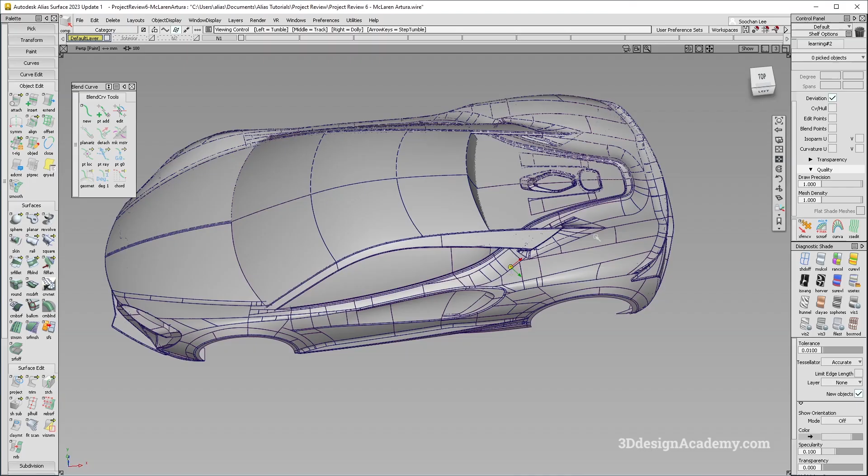In this lesson, I will be doing a project review of a McLaren Artura model. Now, if you guys remember, I did a project review of this model quite some time ago. The person who created this also sent me his latest improvement, so let's take a look at it. So I'm just going to turn this off and turn on the new model.

And as you can see, he made quite a lot of improvements in the model. There were more features added, such as this hood feature over here. Wheels were added, more details, as you can see. So overall, quite a big improvement. So if you were to just do a side-by-side comparison between this one and this one, let me just move it a little bit more like this.

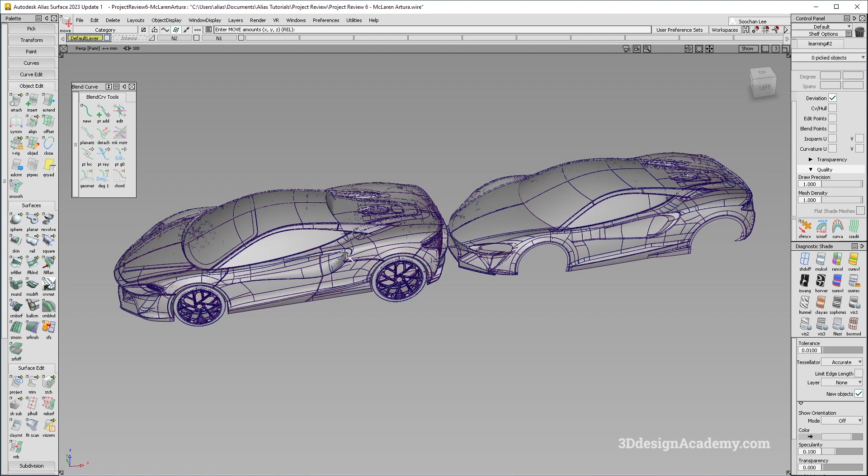You'll see that now the patches are a lot more logical, especially in this area. This area is a lot smoother, less patches, which means surfaces are going to be cleaner. There's definitely more details. Even the CV structure, if you remember this one, I think there was a little bit of an issue here. I think that's been resolved. Overall, quite a lot of improvement.

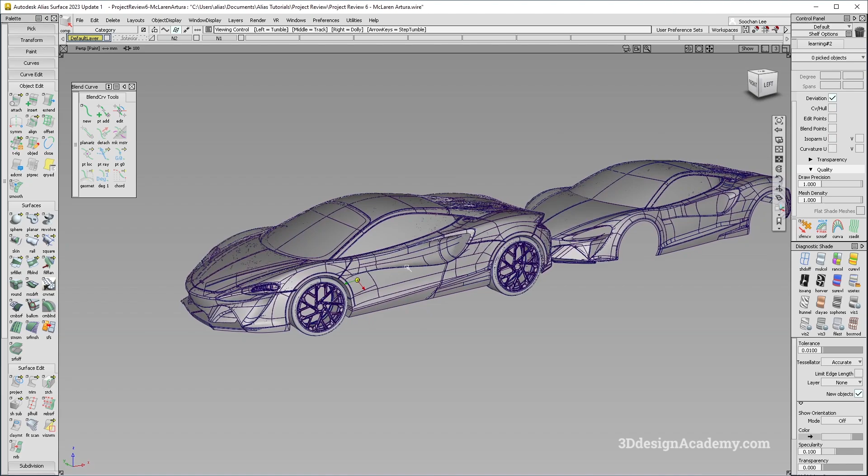Now, that said, there are a couple of things that I did want to provide some tips on. So let me just turn this off and let's get started. I'm just going to turn the symmetry off on this one. So if you look at this with just the reflective shader on, you'll see that there are a couple of areas which have a little bit of a highlight issue.

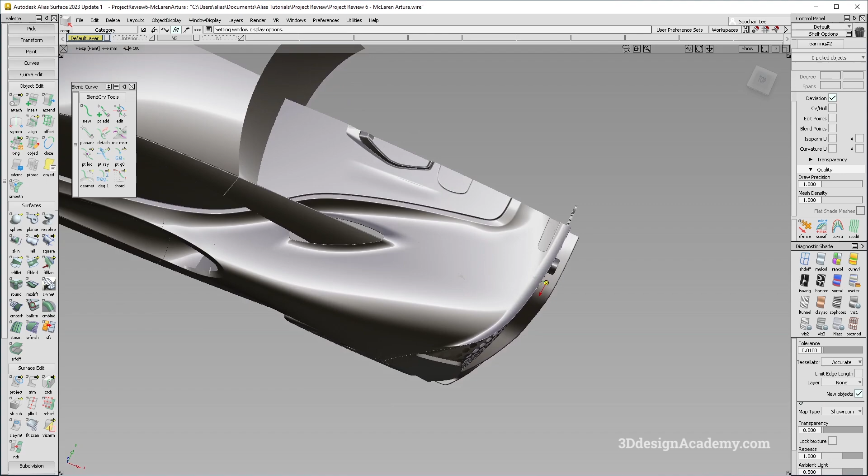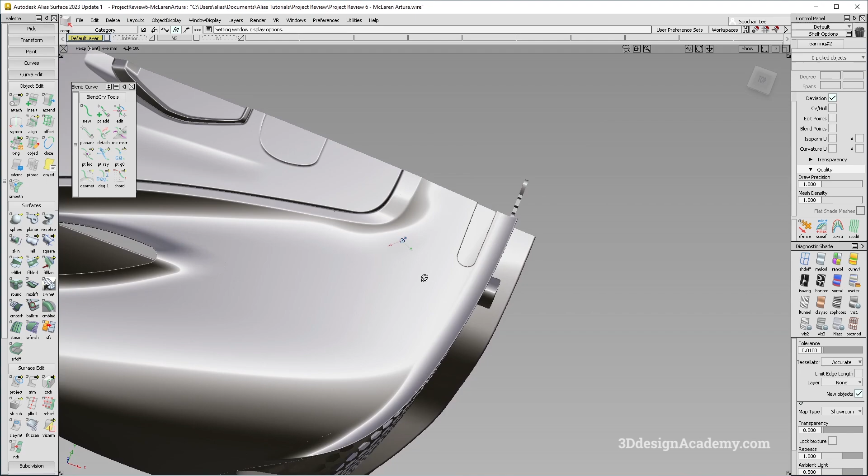Now, this is a huge improvement from before, especially this area. The adherence to the design is a lot closer. This is smoother. Overall, huge improvement, but there are a few areas that could use a little bit of help. So let's go ahead and tackle those. The first thing I wanted to point out is this highlight over here. You'll see that there's something funny going on in this area.

The first thing you need to do is turn on the CV structure on these surfaces over here. You'll notice that there is a little bit of a dip, and that's probably one of the reasons why this highlight is being created. So I'm just going to untrim this one over here, and try and see how it changes with just a simple freeform blend.

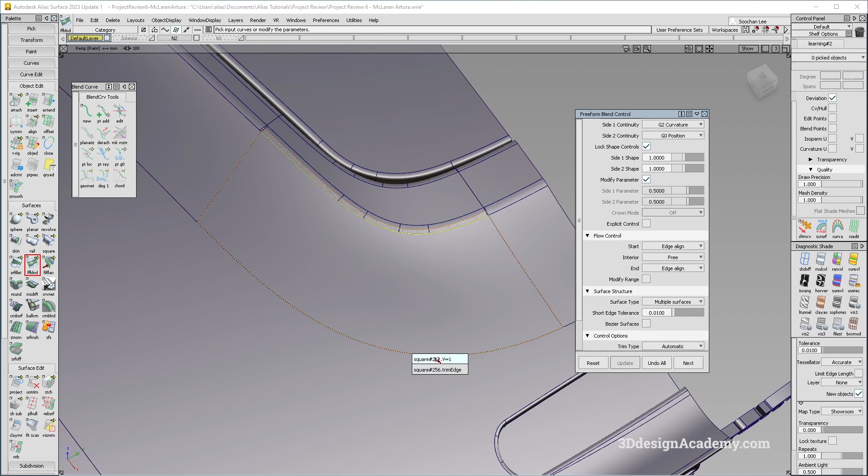So I'm just going to do a freeform blend, and it's going to be side one over here, and it's going to be curvature, and this is just going to be position, and I'm going to say curvature like this. Okay, so that's not going to work. So I'm just going to hit this edge over here and pick this one over here, and let's see if it helps or if it doesn't.

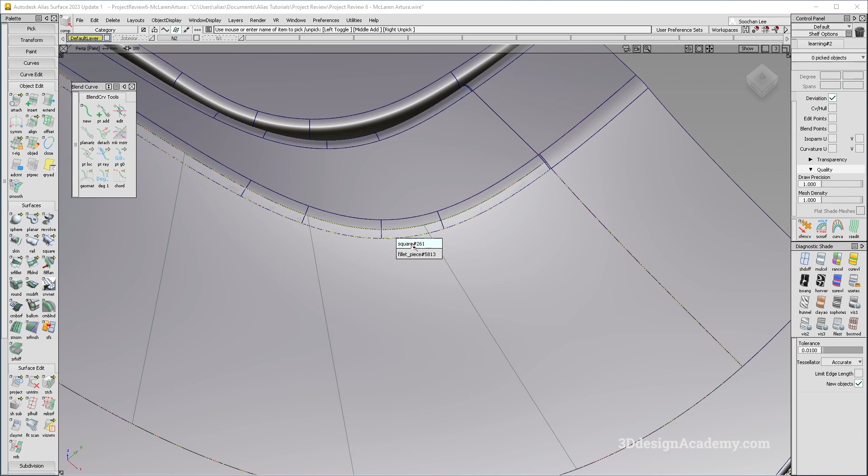So I'm just going to turn that off over here, and let's take a look at this piece over here. Let's see if I can just hide it. So it looks like it's this one over here. I'm just going to create a new layer, and let's hide it over here like this, and let's take a look at the highlight after that.

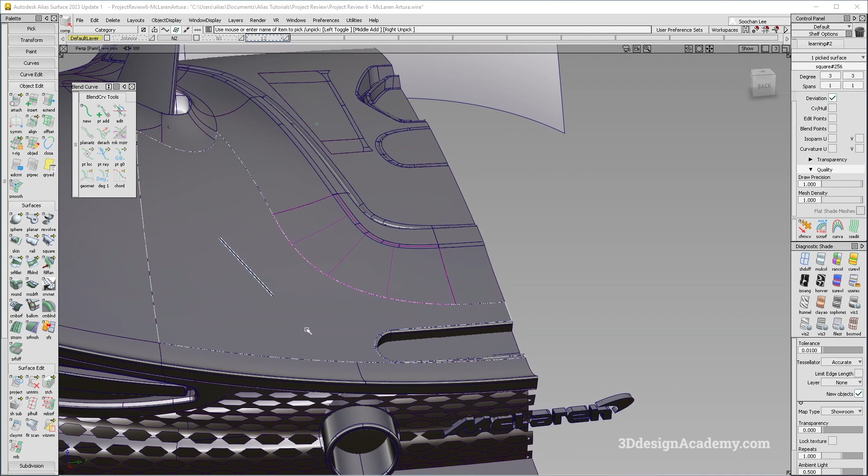Okay, so you'll see that the highlight issue still persists, and then what you have to do is take a look at the primary surface that's underneath it. So I'm going to pick these surfaces over here, isolate these ones, copy and paste over here, and say hide selected. I'm going to untrim over here just to get to the theoretical, and untrim this surface over here, and you can see if there are going to be any issues.

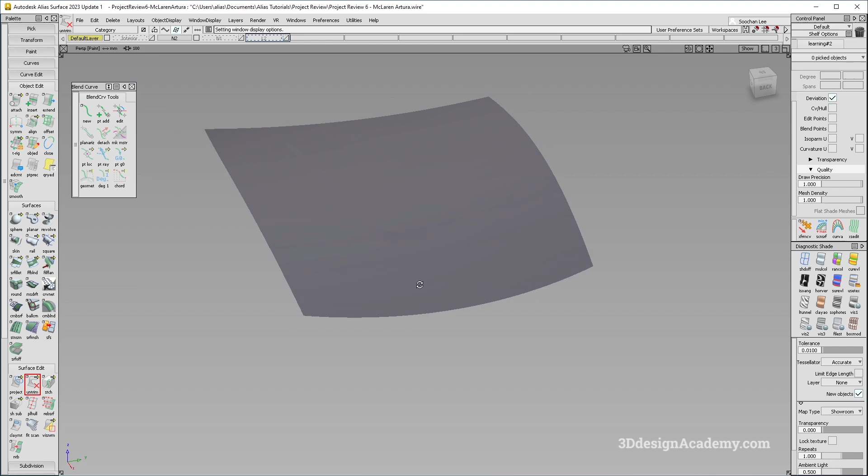So I'm going to create a draft surface, just regular draft, and I'm going to say chain select over here. I'm just going to create a surface like this. All right. So if you look at this one, you'll see that there's a varying thickness between this one and this one over here. So that's one of the reasons why there is a weird highlight.

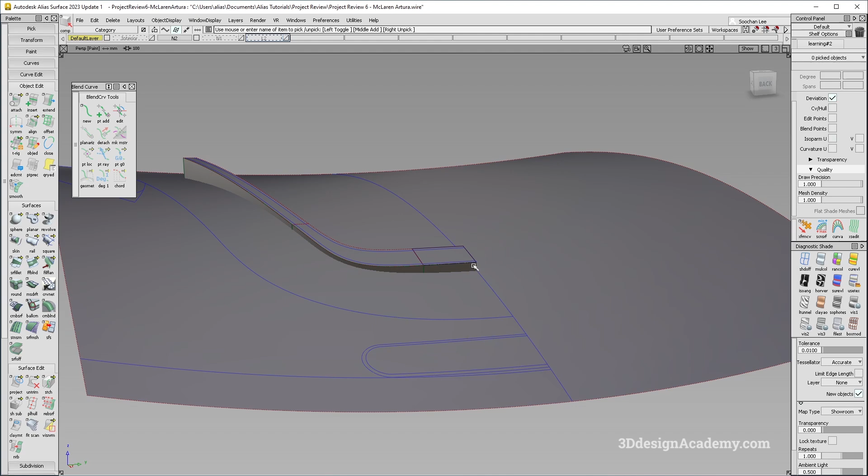In order to prevent this, the surface that you're aligning to and this surface over here should be very complementary. So what I'm going to do is just copy and paste this one over here like this, and maybe I'll just move the CVs a little bit in order to get the shape that I want.

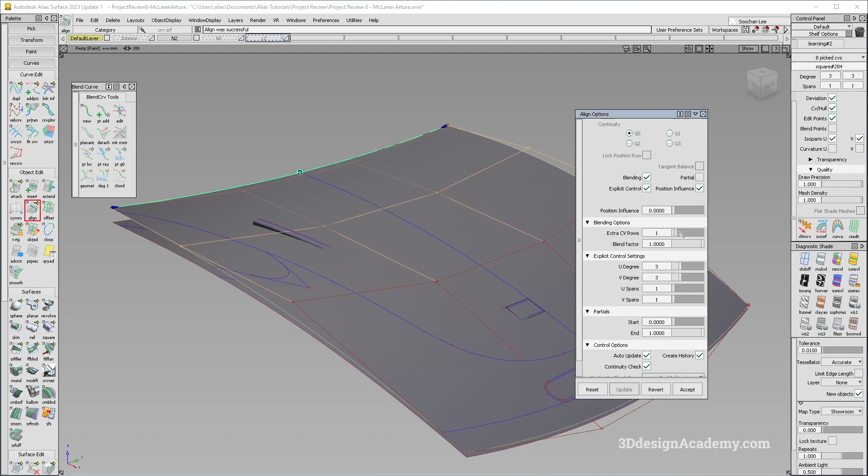So I think I'm just going to do a duplicate over here, and of course it has to rise as it goes forward in the car. So I'm just going to do that, and let's go ahead and do a couple of blends over here. So overall it's just rising as it goes towards the front. I think actually I'm just going to leave it like this. Of course, it looks like the most forward point needs a little bit more. So I'm just going to do that.

Oh, I don't know why the camera is on. So let's turn the camera off.

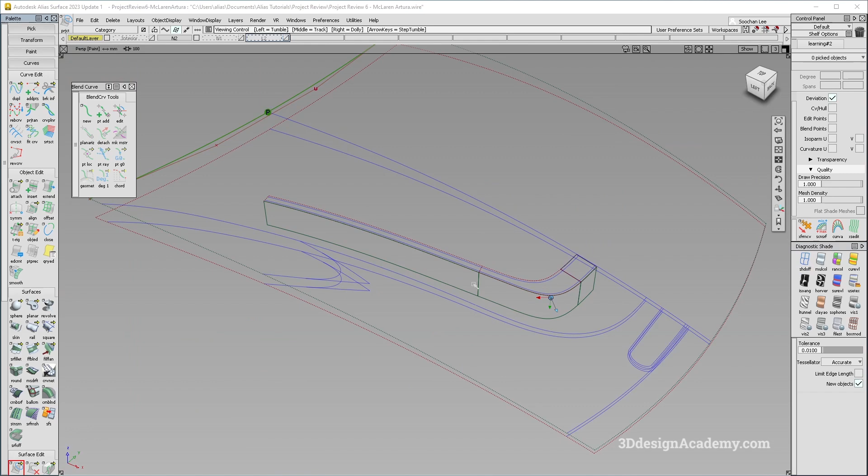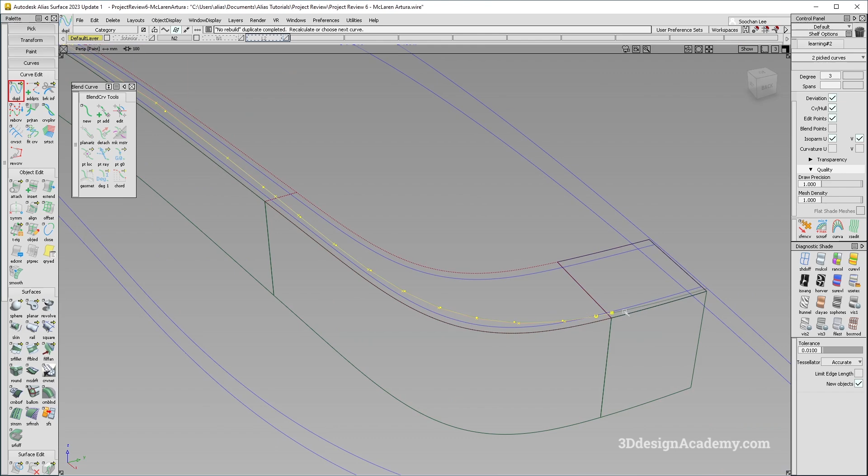And what I'm going to do is project these edges onto this top surface over here. So I'm just going to project it in Z like this. And I think that's going to have quite a bit of improvement. Okay, so now that's done, instead of aligning it to the surface, I think... actually, you know what? Let's do that to the surface because of the number of spans.

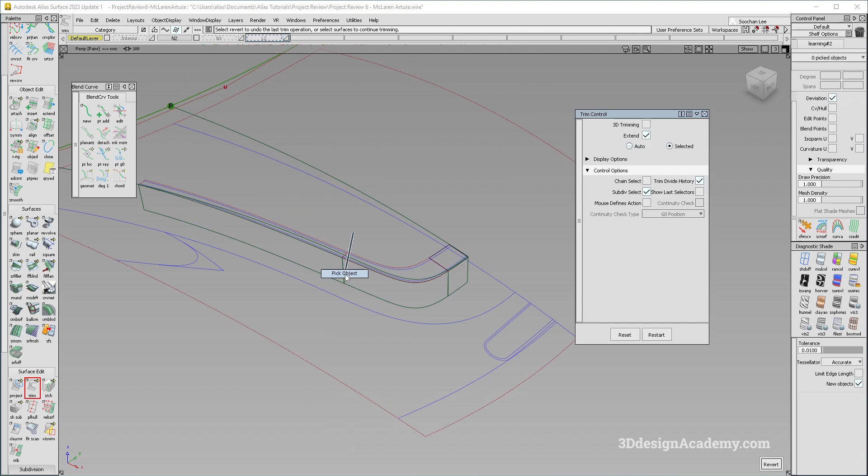So first of all, let me just do an extend over here. Oh, looks like it won't trim. So I'm going to see if I can just extend the COS and trim the surface. Oh, there we go. Okay, so now I'm just going to trim this one over here like this. Now I don't need the draft surface anymore, so that's going to be gone. And these surfaces over here I'm also going to get rid of. All right, so now if I were to do a draft between this one and this one, you'll see that there is a very gradual transition from here to here.

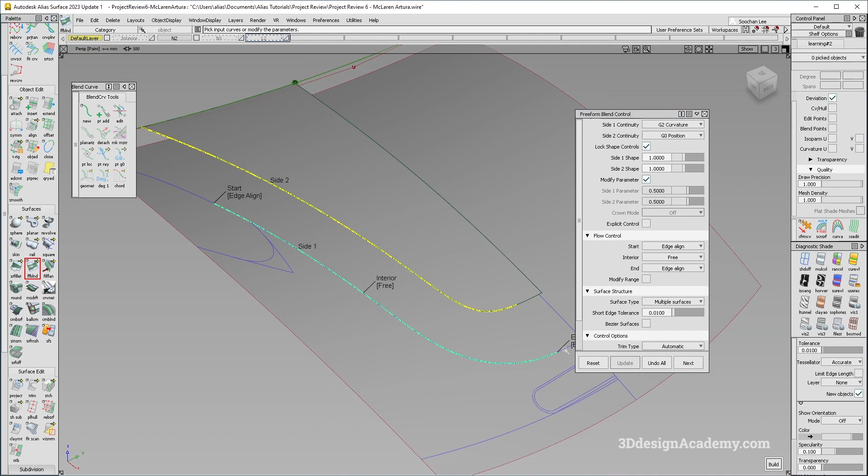So now let's find out if this had a positive impact on the highlight over here. So I'm just going to click here and here like this. I'm just going to say default, same thing. It's going to be curvature on one side, position on the other. Okay, so it looks like the CV structure is a little bit weird, so I think I'm just going to do it one by one. Default over here. Actually, this one, let's do connect ends like this.

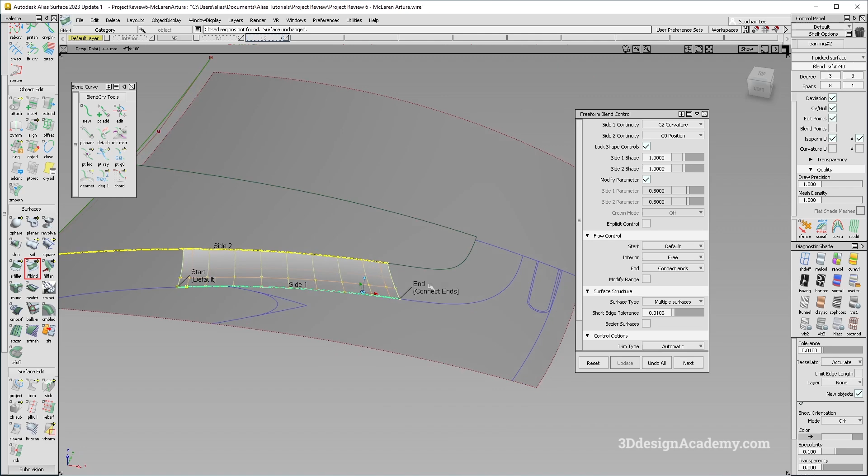Now, multiple surfaces. Okay, so I'm not going to spend too much time cleaning this up. I'm just trying to show you guys how it's... oh, wow. Okay, so it looks like that had absolutely no effect, but that's okay. I'm just trying to demonstrate how highlight works in this one. So even if there are multiple spans, I'm just going to let that be.

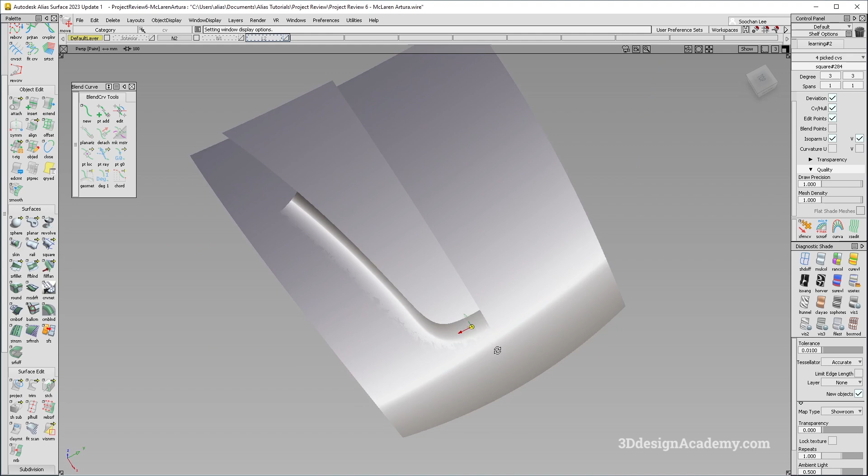Okay, so if you look at the highlight now, you'll see that there is a much more gradual transition between the two. Now, of course, if you want this transition to be a little bit smaller, you can try to pick these CVs and just bring it down. But overall, because of this very constant relationship between the top surface and this one over here, you'll see that the highlight is a lot more consistent as well.

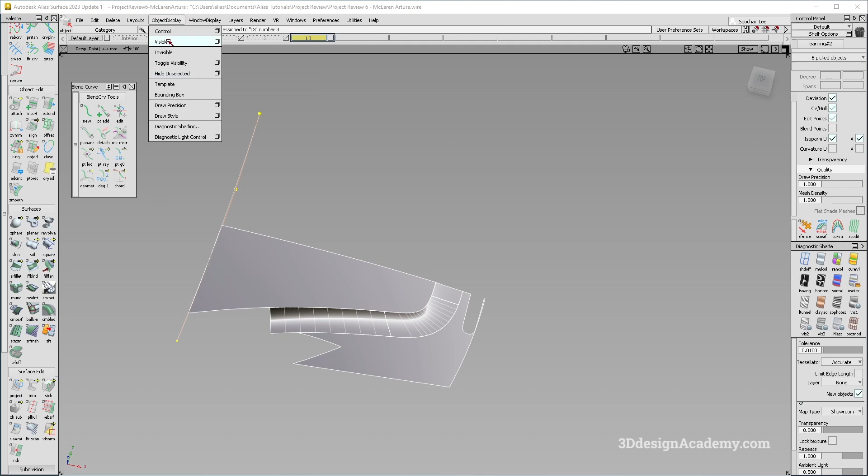Okay, so let me give you a quick before and after between the two. So I'm just going to delete the construction history over here, and put it in a new layer like this. And let's hide those, and let's grab these ones over here like this, and put them in a new layer like this. I'm just going to turn them off, and let's do a comparison between the two.

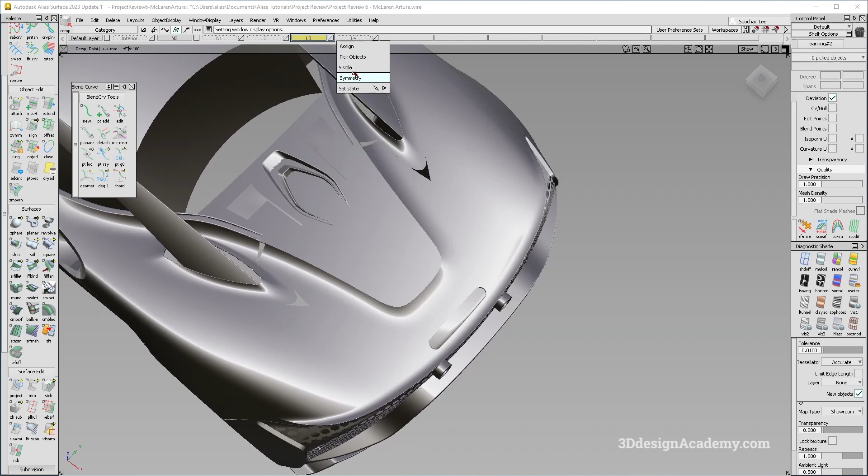So if you look at the highlight over here, actually, it's probably a good idea to turn symmetry on as well. So I'm just going to have symmetry on like this. And if you were to compare the two, you'll see that the highlight flow is a lot better. Now there is a break because of what I did over here, but as you can see, the highlight flow is a lot more consistent over here, and you can see a very clear side-by-side comparison.

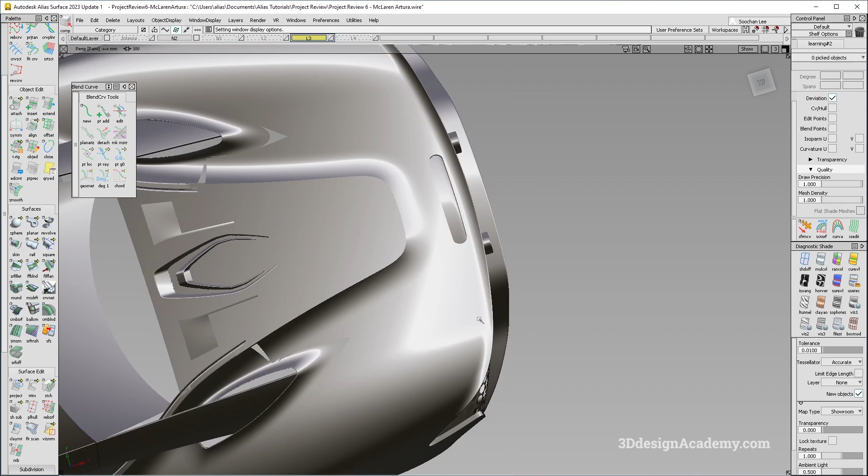Now this highlight on the other hand looks very good, so I think it just needs a little bit of improvement here. Now, moving on to the next subject. So if you look at this one over here, there's a little wiggle in the feature line. So in this case, it looks like this person used multiple surfaces to create this.

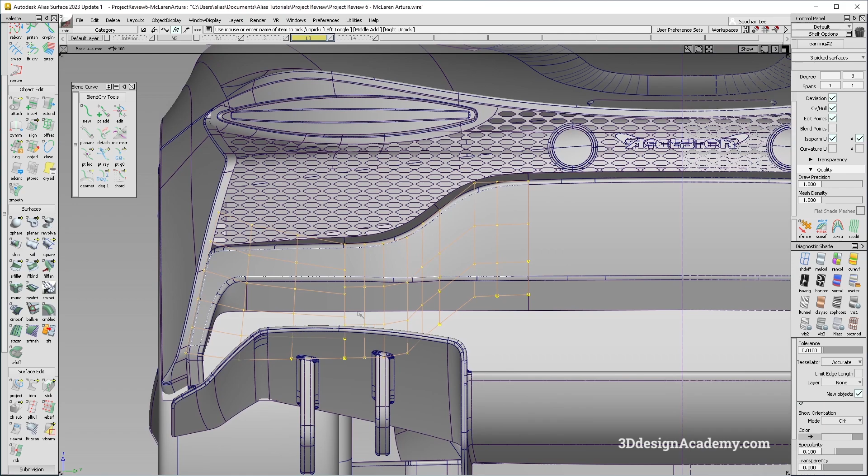Now it is always a good idea to build to the theoretical. I'm guessing this is more like a primary surface, but you'll see that it's not to the theoretical over here. So this surface over here and this surface should actually meet right at the center, and you should just trim between and do a fillet between these two in order to create it.

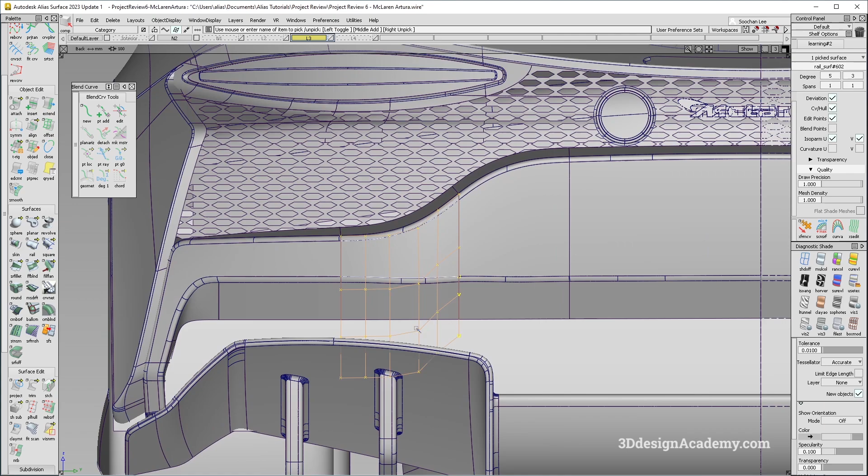Now, of course, that is not the main problem because at least I think the surface is nicely balanced over this fillet. But as you can see, there is a little wiggle over here. So what I would do in this case is just take these surfaces over here like this, and let's just go ahead and untrim this one, like this, over here all the way through.

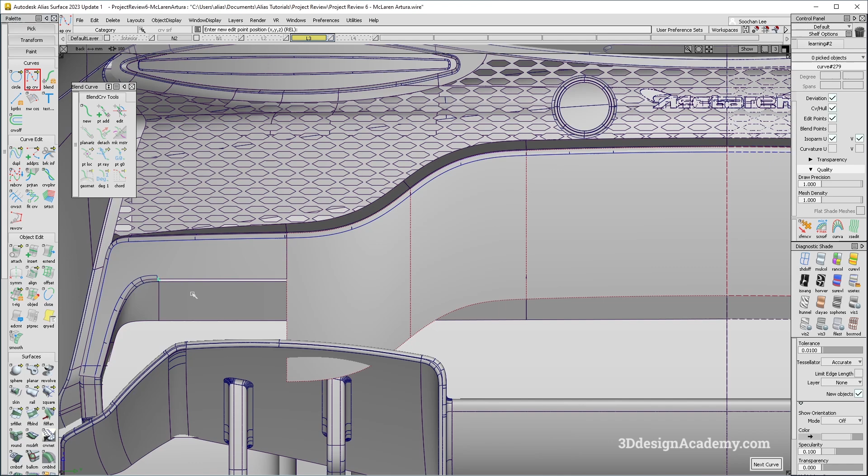Actually, you know what? I'm just going to do one more. Before I do though, let's just strike a line. So I'm just going to strike, oops, just going to strike a line just straight like this. Actually, I think this one is pretty straight, so that's good. So what I would do is I would just get these surfaces over here and just project it from view, and just trim over here like that. And that's going to create a much straighter line over here.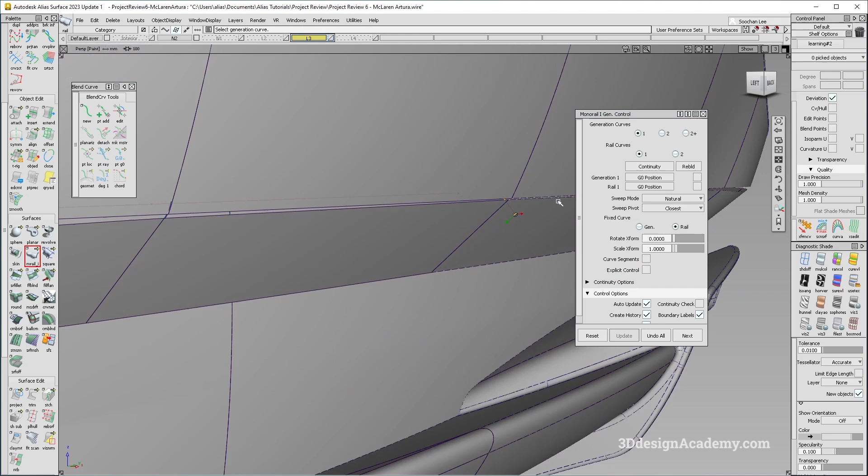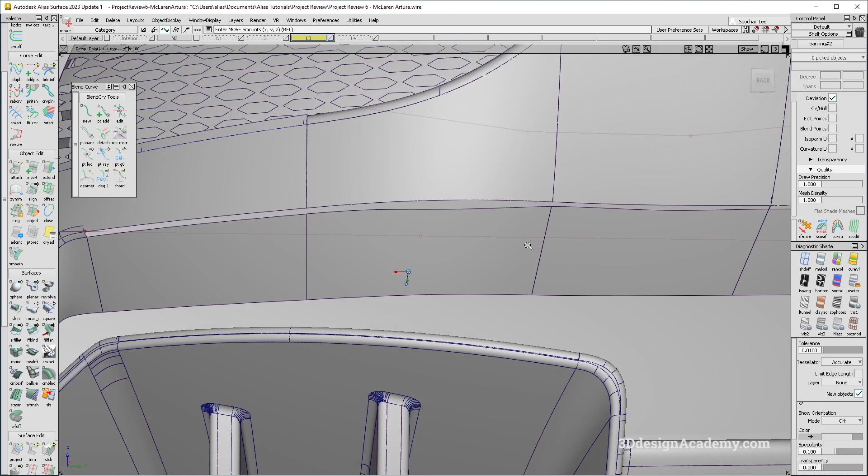So now what I'm going to do is I'm just going to create a rail over here. So let's go ahead and just duplicate this edge over here like this. Actually, let's turn the symmetry off on all of these as well, so that's a little bit easier to work. So I'm just going to make it degree 2, just nice and simple, like this. Now it could also be due to a surface interface, but it looks like there is nothing there. So I would just ignore that.

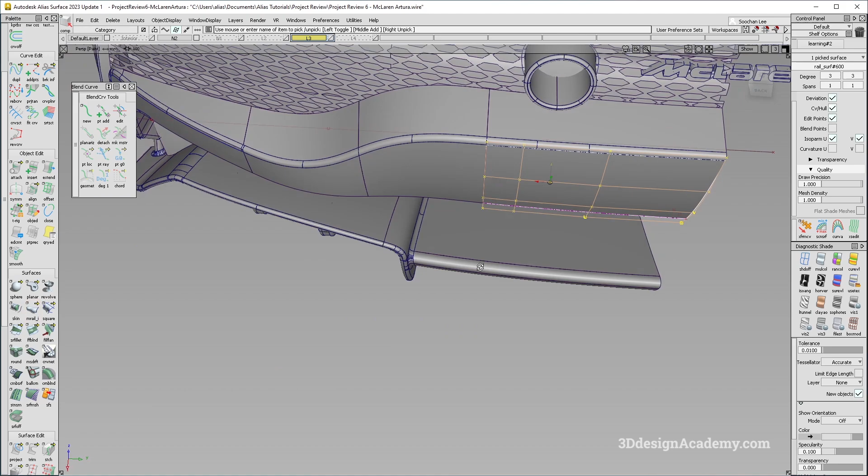And I'm just going to do a rail all the way through. And let's just keep it parallel just because of all the... Oh, wow, that's quite a lot of spans. Oh, okay, so that's probably due to the amount of acceleration that the surface has. I would prefer not to have this much CV acceleration towards one side. I do prefer to keep things a little bit more constant.

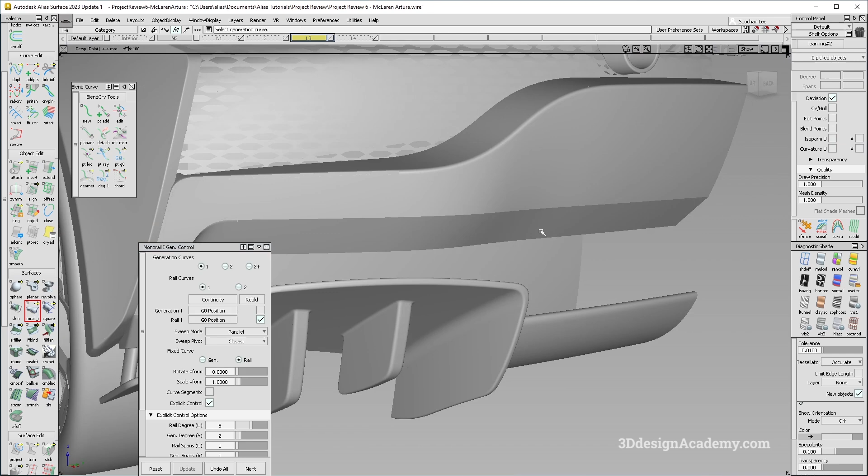But since I'm not trying to do this demo for surface cleanliness, I'm just going to quickly go through this. And as you can see, the feature line is going to be a lot more consistent, a lot more straight. So that's going to be overall a better model as well. And of course, all you have to do is just finish it with a fillet, and that'll be it. Okay, so moving on to the next topic. So those were a couple things over here.

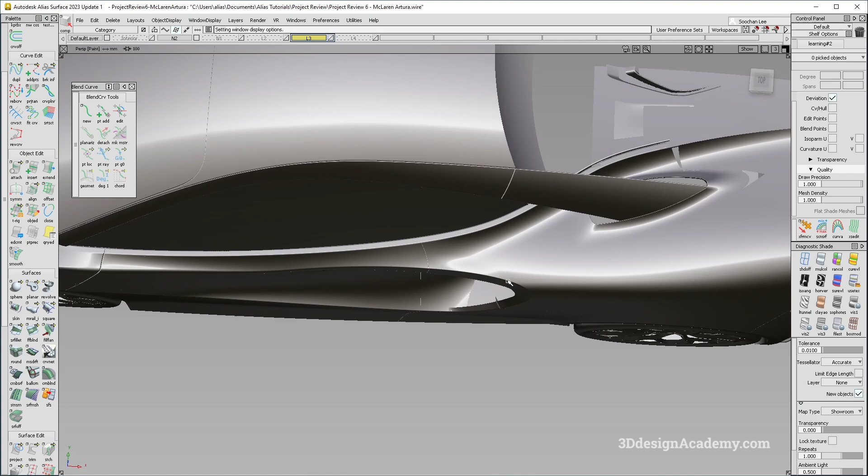Now this is a little bit more complicated. I think the overall highlight between this over here is a little bit better than before. That said, however, there is still a little bit of wiggle. And if you do a little bit of a deep dive, you'll see that there is a CV structure that's going like this and up. Of course, this is very difficult to blend. So what I would actually do in this case is...

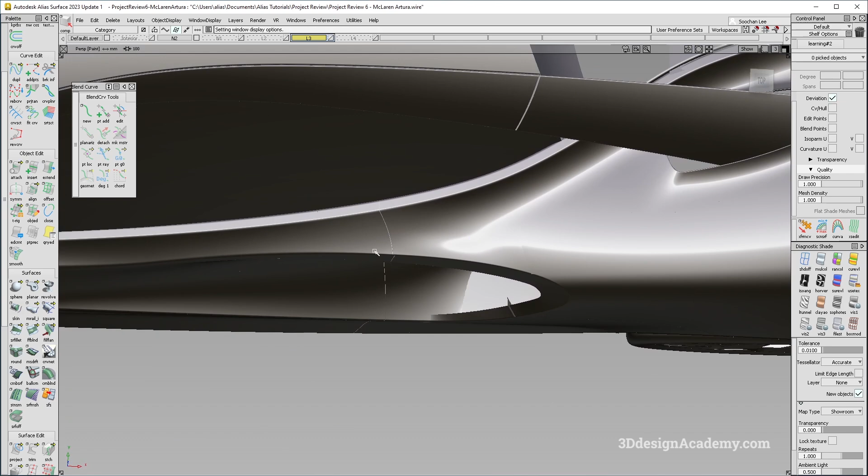well, first of all, I would actually connect all the surfaces to a theoretical, because right now there is no theoretical. Now, it's quite possible that it's a trim converted surface, but if you look at the highlight over here, you'll see that it's going up and down, and of course that is probably going to carry over here as well. So let me see if I can just connect these two over here. Actually, it is already connected.

And as you can see over here, there is a little CV up and down in the CV structure. So of course that is probably going to have an effect over here. So actually in this case, I feel like this surface could have been just a continuation. But let's try to at least do a little bit of patch adjustment to see if I can make it a little bit better. So first of all, I'm just going to delete this one over here, and let's just go ahead and untrim this surface over here like this.

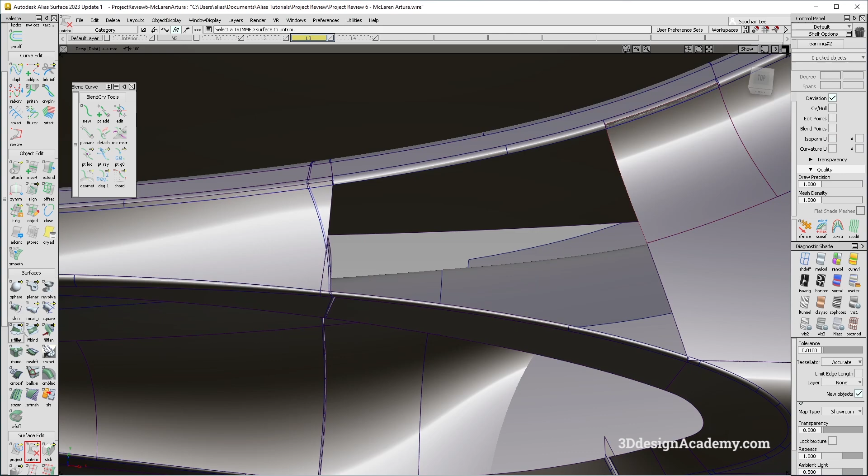And I'm going to just see if I can make a little bit of improvement over here. So what I'm going to do is, actually, you know what? Let's get those surfaces back to the theoretical, because I don't want it patched like that. So let me go ahead and do a freeform blend between these two like this. And I'm just going to make it G2 over here. Now, with an edge line, it's probably going to do something like that.

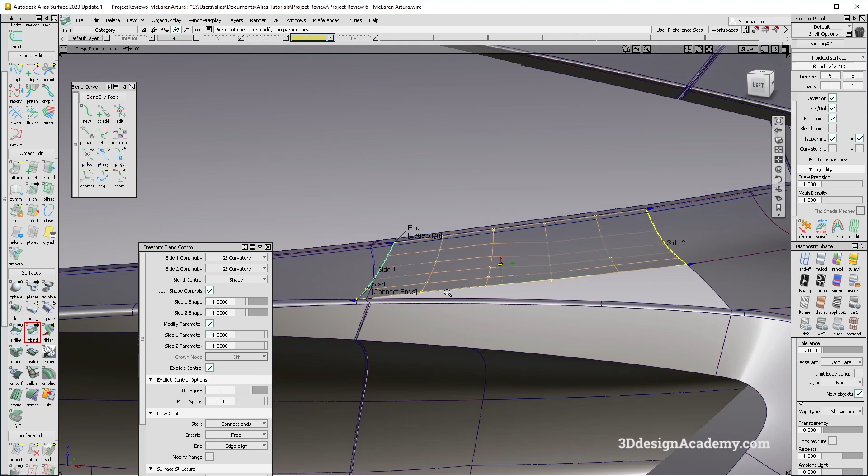Actually, you know what? The CV structure doesn't, oh, okay, so there is a little bit of, oops, let me just go back over here. So you'll see that there is a little bit up and down. So of course, I would prefer to build to a theoretical, but since the theoretical is not there, I'm just going to go ahead and do a little massaging here and there.

So what I'm going to do is a transform CV, and let's do a proportional mod. And maybe I'll just do like 50 over here. And I'm just going to push these down. Oh, actually, you know what? There is a little wiggle over here. Now, that's it, however. I don't know why. Oh, why are there multiple surfaces all of a sudden?

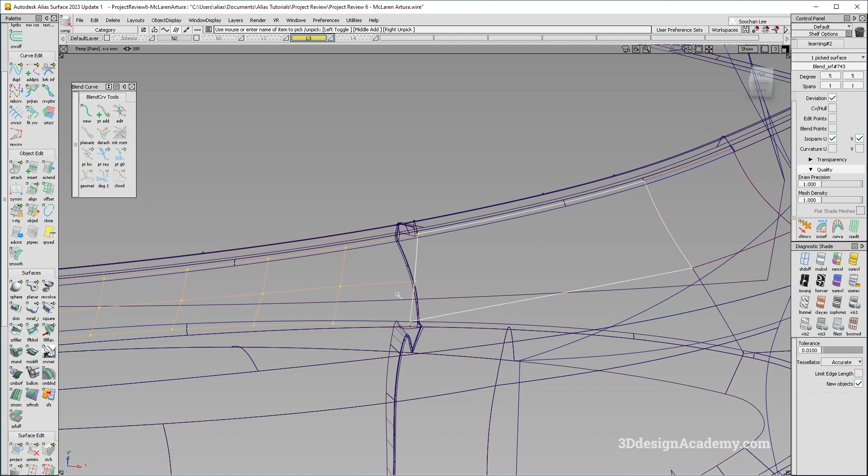Oh, wow. Okay, so let's go ahead and pick everything over here. I'm just going to deselect one, and that'll be it. I don't know why it's suddenly like that. I don't even know what's going on over here. Hopefully, Autodesk can fix this. Okay, so I'm just going to copy it, delete it, and paste it again, and looks like it's gone. I think there was an error like this some time ago that was verified.

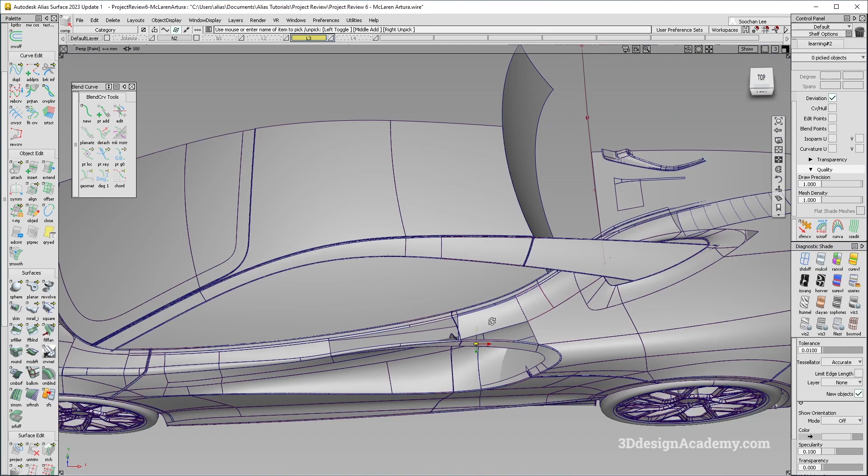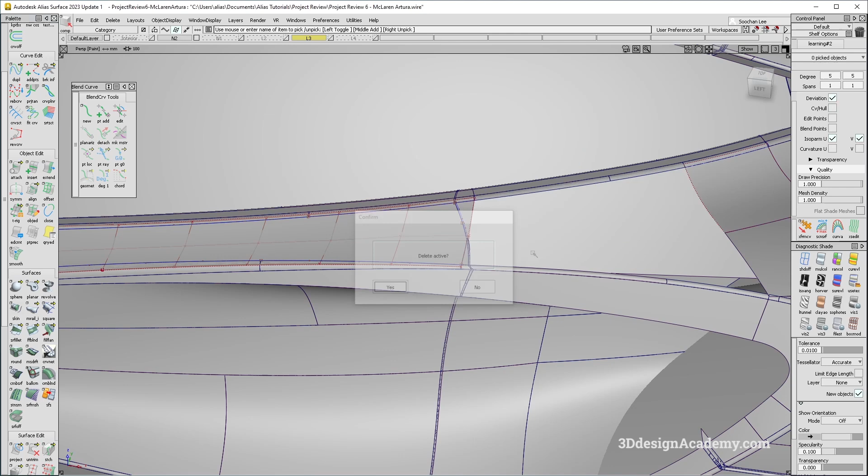Well, obviously I don't have the surface anymore, so I'm going to have to bring that back. Okay, so I just pasted this original surface back in. So now hopefully I can actually do the modifications that I need. So I'm just going to untrim this one over here like this, and let me just turn that off. I'm just going to do a freeform blend between these two, and I'm just going to keep this as connect. And as you can see, there's a little bit more volume here than on this side.

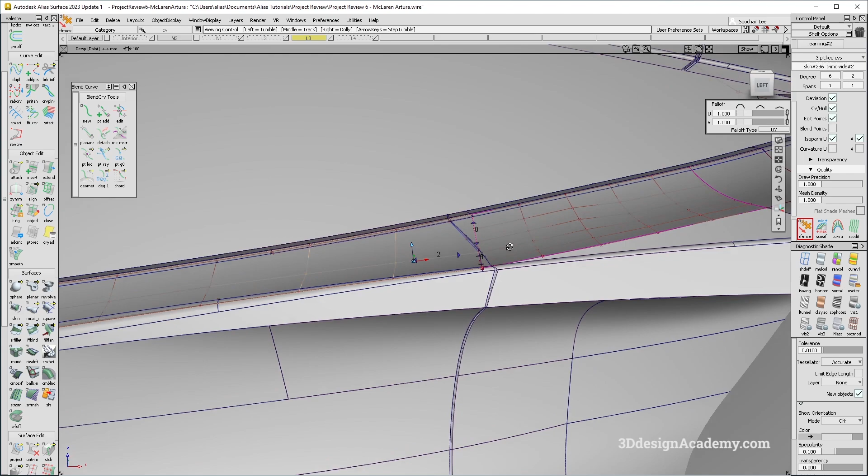So what I'm going to do is, first of all, let me just clean up the CV structure a little bit. So I'm just going to do NUV like this, and after it's a little bit more consistent, I'm going to do a prop mod like this, and I'm just going to bring the whole thing down like that so that the CV structure over here is a little bit more in line with everything else.

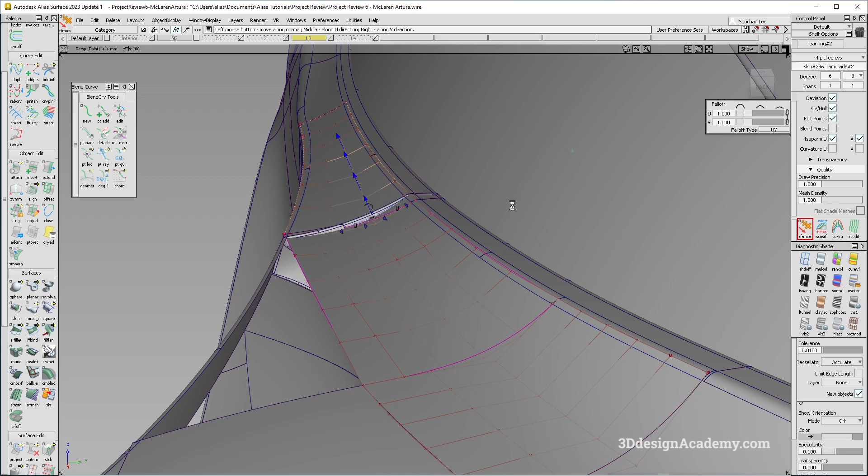Now you can do vice versa, so you can either adjust this one or that one, whatever works for you. But I think the section, because this is actually a degree 3, should replicate that. So let me just make this a degree 3. And I'm just going to do a prop mod over here as well, like this. And I'm just going to bring this down so that it's a little bit more consistent between the two.

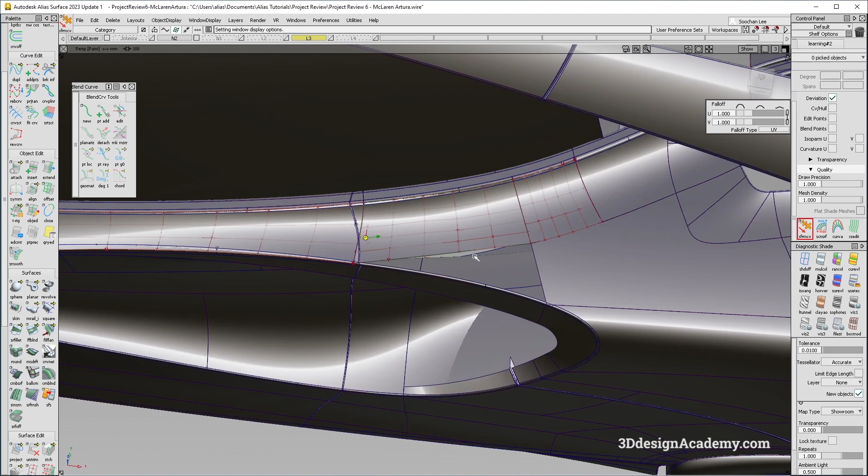I think this one should probably be edge align. There should be an edge align. So what I'm going to do is, actually, you know what? If that's the case, let's do this. I'm going to go ahead and do a rail.

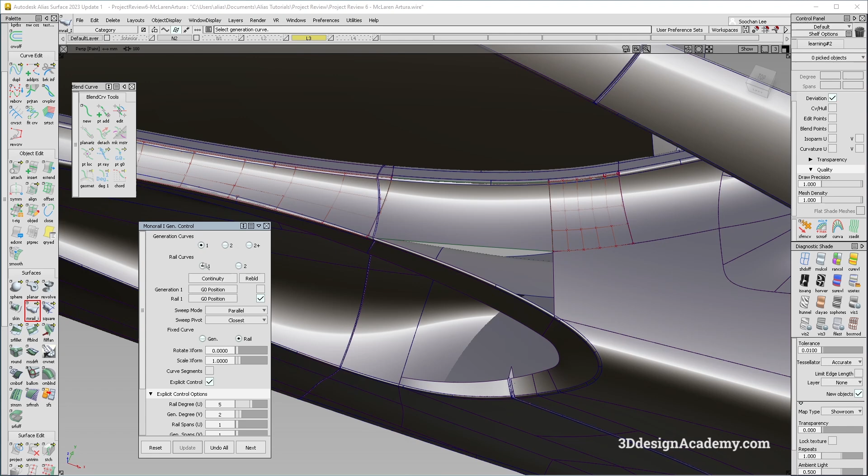Well, technically, I think this should actually be a primary surface. So let me see if I can just extend it and if it's going to give me a trajectory that I need. Okay, so that's a problem. So if you look at this one over here, you'll see that this extension of the surface is actually going down. I would think that you need to actually bring this up, which means you need to bring the entire surface up in order to get a little bit better transition.

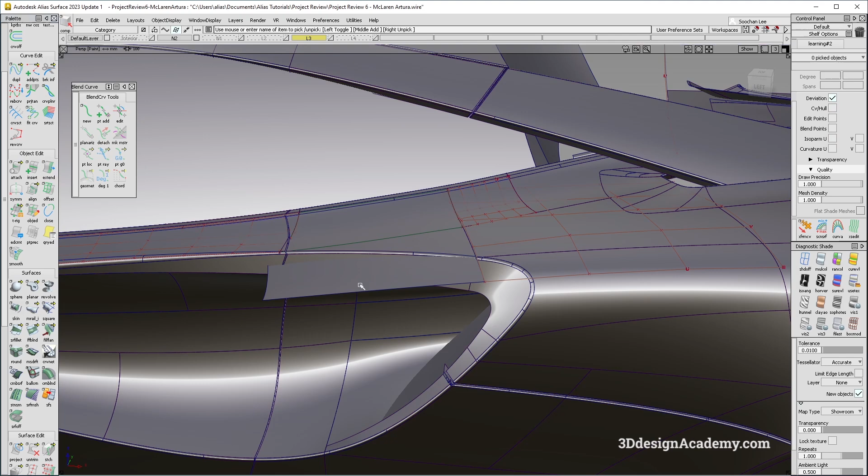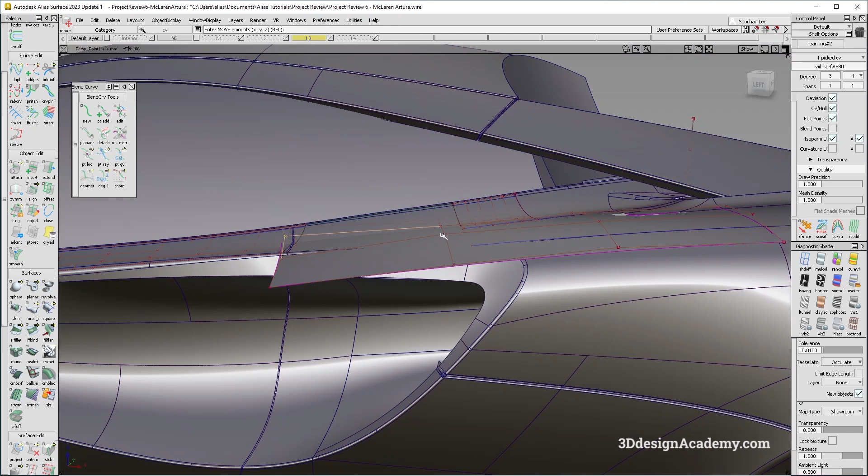So what I would actually do in order to fix the primary issue is I'm just going to extend this, delete that one. And let's just go ahead and extend this surface all together like this, and you'll see that it goes down. I would actually bring this up over here like this to make sure that it intersects nicely over here. Actually, I'll probably pop this one up and pop this one down, and I would lower this down as well, to make it a little bit more level over here.

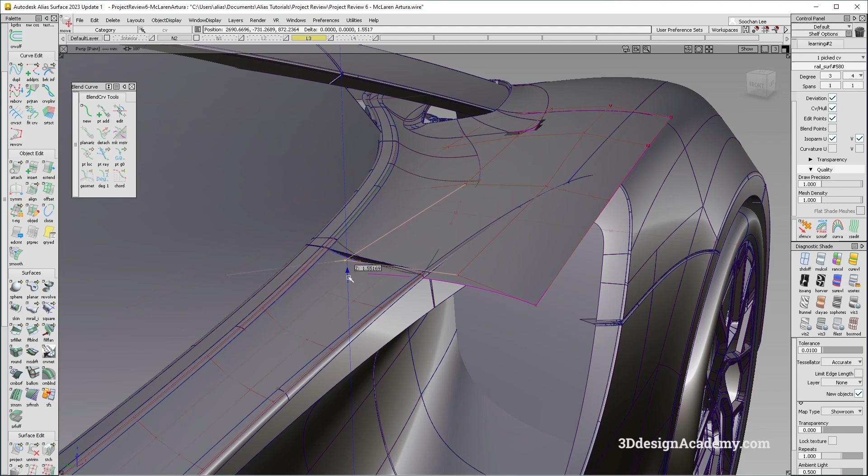So now you got a consistent section all the way from here to here, and it's still pretty close. Now there of course needs to be a refinement over here, but this is going to allow a little bit better build. Now as far as this side goes, I will probably lower this side just so that it goes a little bit below, so that you can have a fillet running all the way through from there. So maybe I'll just do a quick something like this, and that's going to allow me to actually create a surface that's a little bit more consistent.

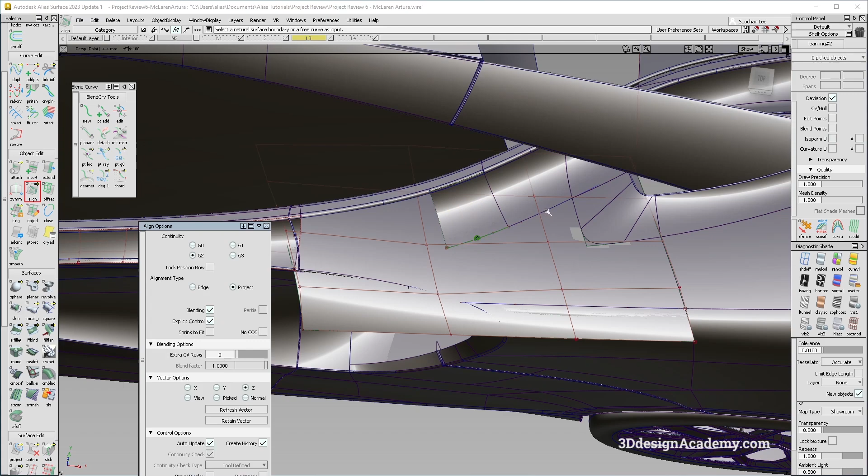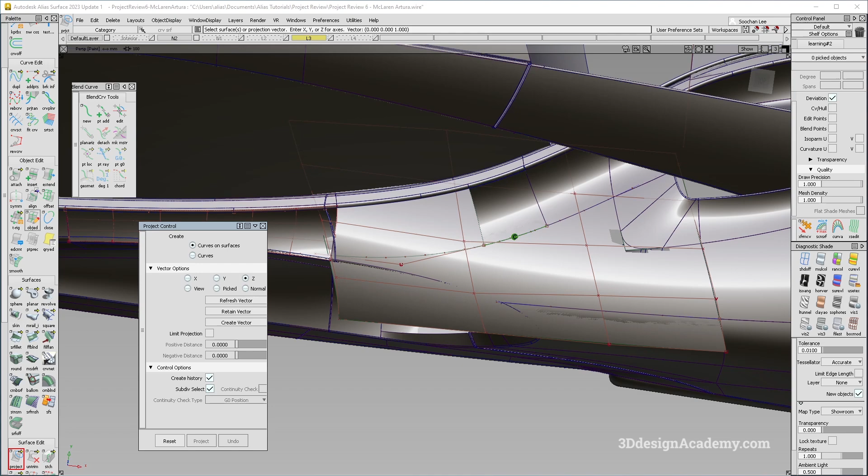Now of course I tortured everything, so it's probably not going to work super well. Well, let's see if I can at least do some align over here. So I'm just going to do a project align over here. I'm just going to do that in Z, and that one I'm going to just leave. And actually since I'm doing this, I can probably just make this out of one piece, but let's do that. And now what I can do is I can just project from Z also over here, and I'll do a freeform blend from here.

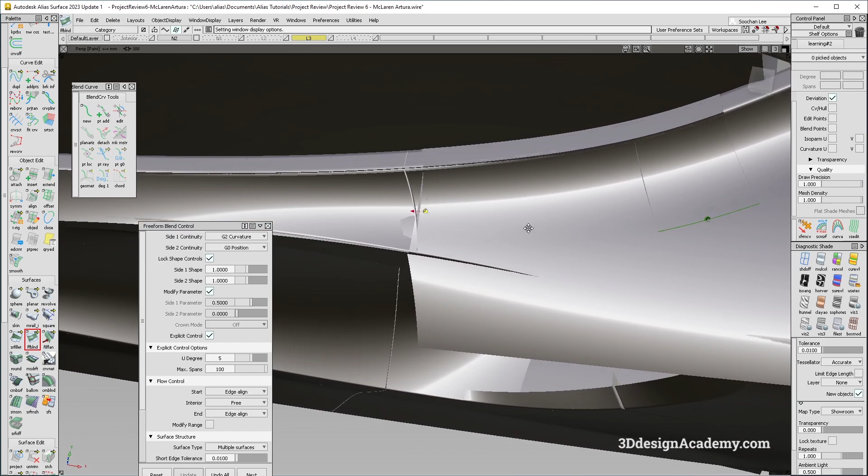Well, actually, let's see if I can get to the theoretical for this one. I'm just going to align over here and here like this. And again, it's just going to be G2 on one side and position on the other. And as you can see over here, the highlight is a lot more consistent between the two. Now that's where there is a disconnect between these two surfaces. So let's see if I can extend this.

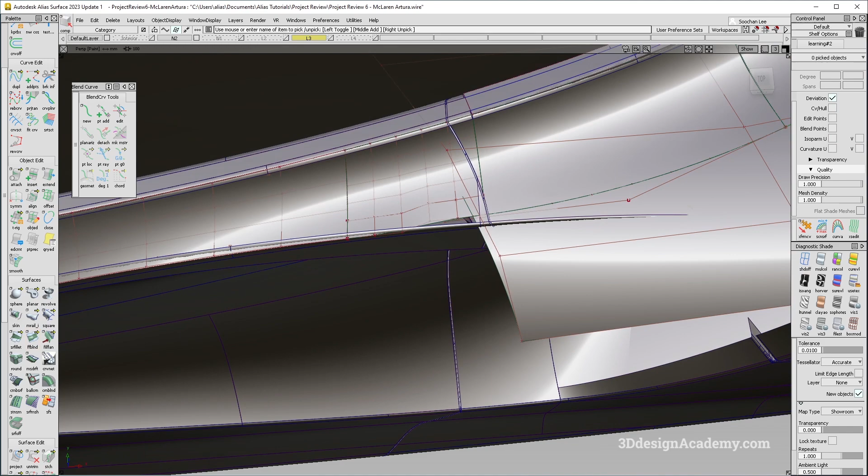Now this is just a real quick patch job, but let's see how the highlight flow is between these two over here. So I'm just going to make a curvature on each side. Okay, so there is a little blip over here. That's because it's just a quick patching in, so it's not consistent. But if you can see the highlight over here, it's a lot more consistent throughout than compared to before. So of course there needs to be a little bit more refinement, but this is something that can be done in order to improve the model.

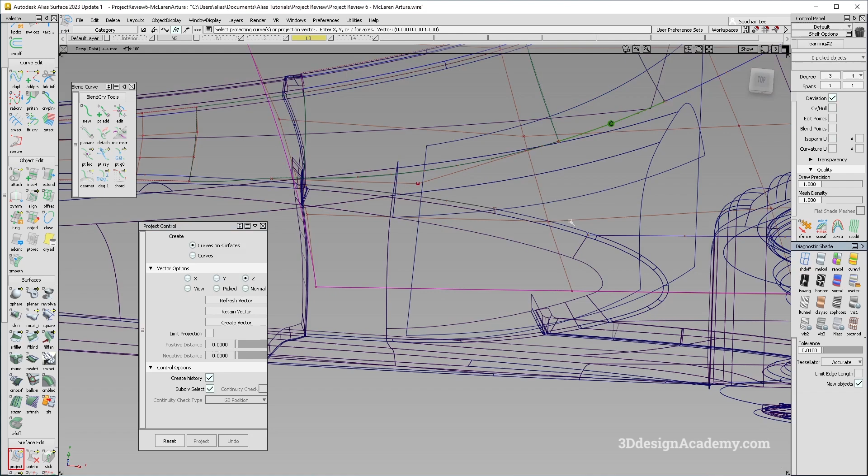So let me just quickly trim this out so that's a little bit easier to look at. So I'm just going to trim that one like that. Hopefully it trimmed. Okay, so it looks like it didn't. So let me just go ahead and do that. And yeah, I think the highlight is a lot better. There's a little blip, so I will probably have to do a little bit better job of connecting everything here. But this is definitely something that can be done in order to improve the model.

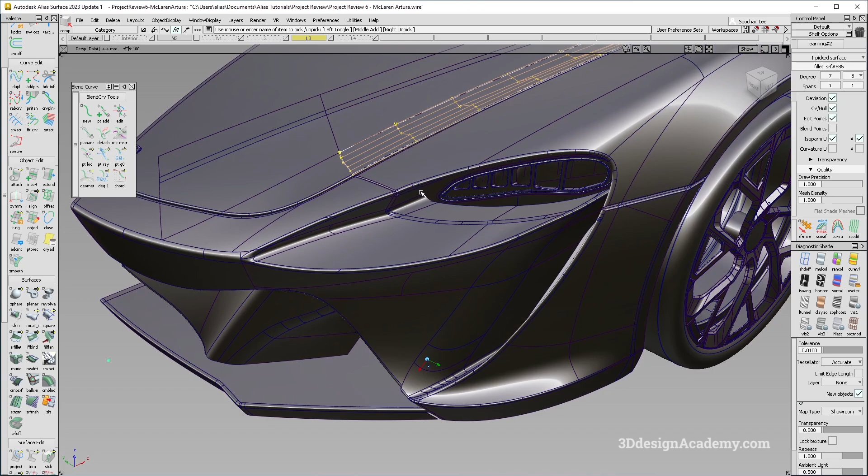Now, there were a couple of other things that I thought could be improved. For example, over here, you'll see that the CV structure is a little bit inconsistent. I think that is contributing to the factor that it's not smooth. So that's probably something that could be done in order to improve the model. So you know what, let's do a quick check. I'm just going to hide and select just these two surfaces over here. I'm just going to do a, let's see, connect ends.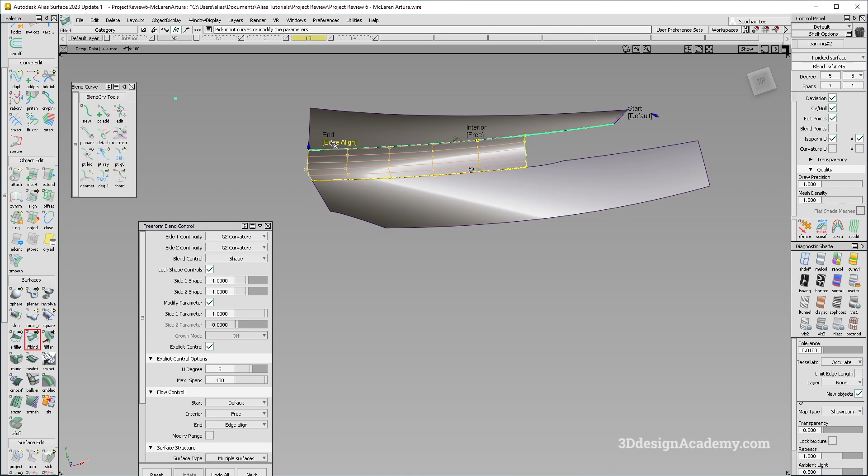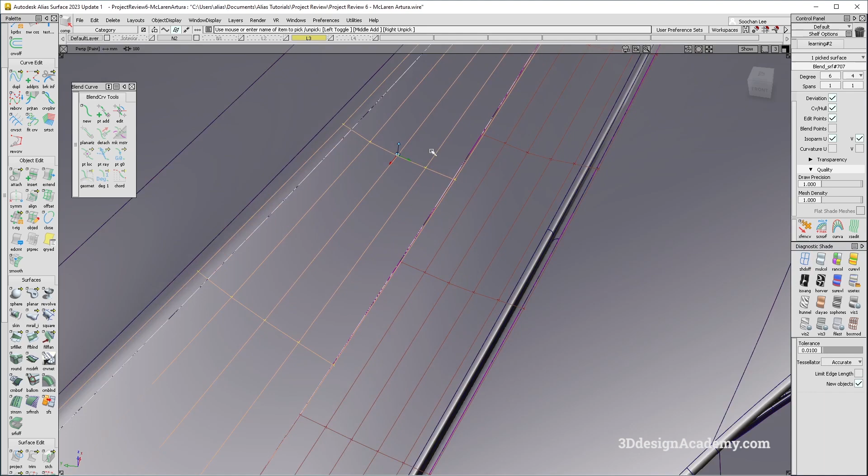As you can see, I think there is still a little bit of inconsistency there. So maybe it's not just the CV structure, but how it's actually structured. So if I were to just go back, I think it's a little bit smoother, but doesn't really improve it overall. So I think the issue might be how it's structured. Basically it's trying to do a curvature alignment, so I think it just needs a little bit more room. I think that's probably the reason for the little bit sharp edge being displayed over here. But to be honest, it's not that bad. Now there are a couple other things as well.

So if you look at this one over here, you'll see that the CV structure is a little bit more inconsistent. So this is what I'm talking about. You always want to build to a theoretical. So if you look at this over here, and let me just untrim these two like this, let's make it a little bit more consistent.

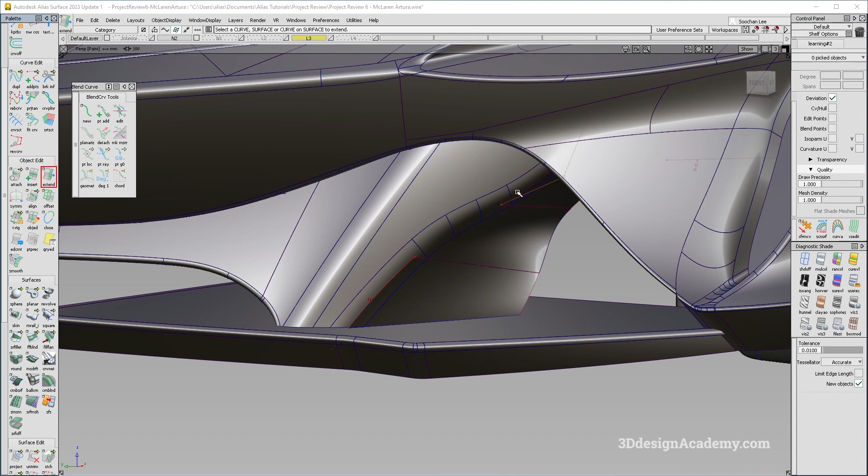So I'm just going to make it degree 2 over here, and I'm just going to duplicate this edge as well. And I'm just going to make it degree 2 like this, and I just want to extend the curve over here like this so that I can actually get to the theoretical. Now it looks like it is, but okay, as you can see over here, now I did rebuild the curve, so that could be a reason, but let's go ahead and connect it like this, and I'm just going to do a stretch tool over here to actually connect the dots.

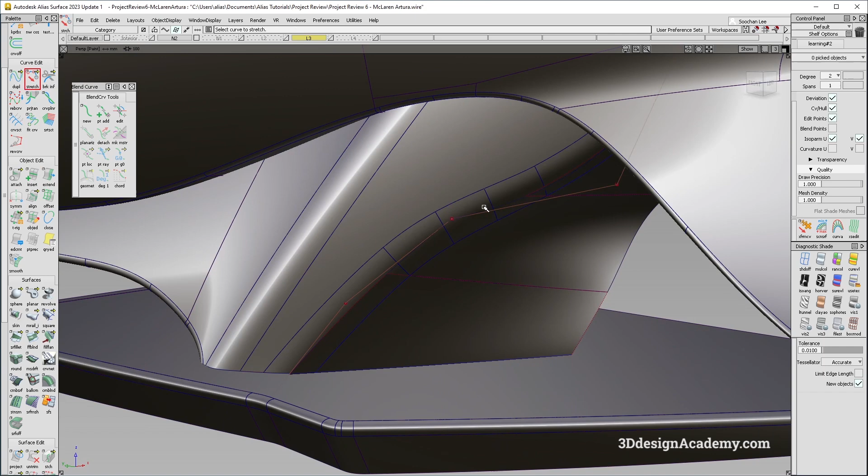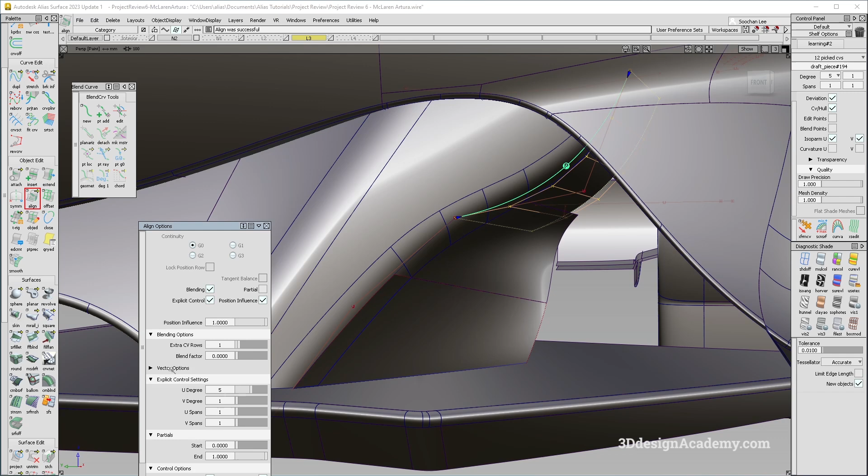And I'm going to align this surface onto the curve like this. It's going to be position influence set to max, extra CV rows of 1, and blend factor of 0 like this. And I don't know why vector option is on, because I'm not doing vector, but whatever. And I'm going to just get rid of this one over here, and I'm just going to strike a rail from here to here. Now of course the position is completely different.

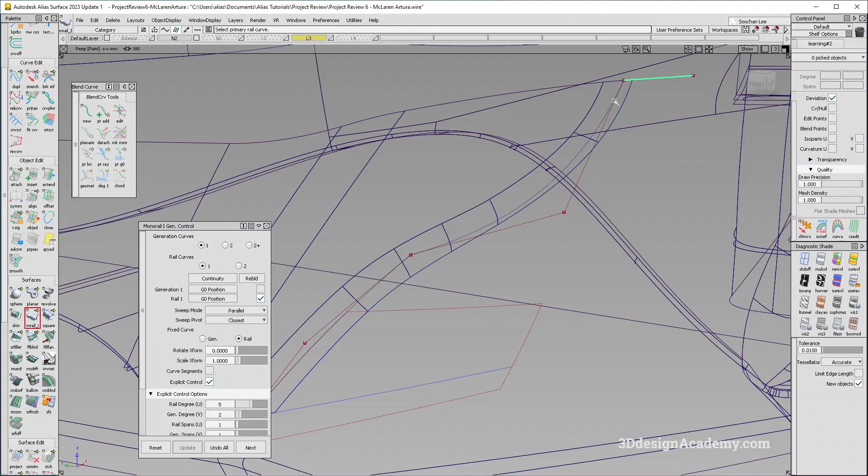Actually, you know what, let's do this. I think I'm going to make this a little bit closer. So I'm just going to duplicate this edge over here like that. And of course I'm going to delete that one. And I'm just going to do a rail. It's going to be natural like this. Of course it's going to do something like that, which is fine. Yeah, so that there's a nice display over here.

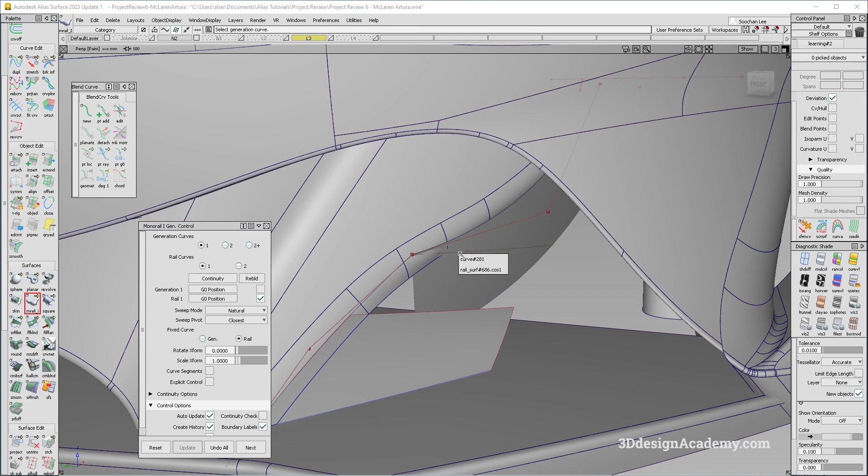And let's go ahead and make it. I'm just going to strike a curve. Actually, you know what? Let's strike a curve like that. Bit of an angle. And just going to project from Y. Just going to do a rail like this. Let's see, natural. I'm going to say parallel for this one.

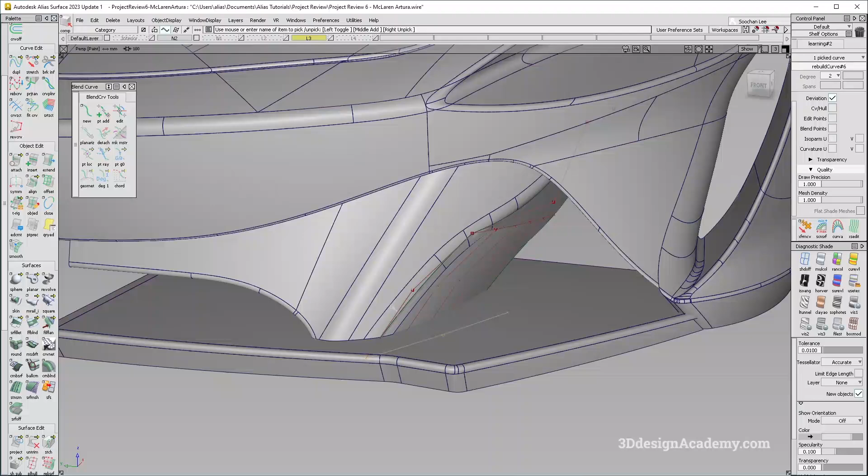I'm actually going to do a little fix on the highlight over here, or the CV structure over here. Okay, so this one probably needs to pop out a little bit more, to make it a little bit more consistent with the other surface that was originally there. So I'm just going to duplicate this edge over here, and let's use the stretch tool to bring it out like this. And I'm just going to align this one over here. Blending will be blend factor 1, like that. So it's essentially a very similar structure, but as you can see, the overall structure is a little bit nicer.

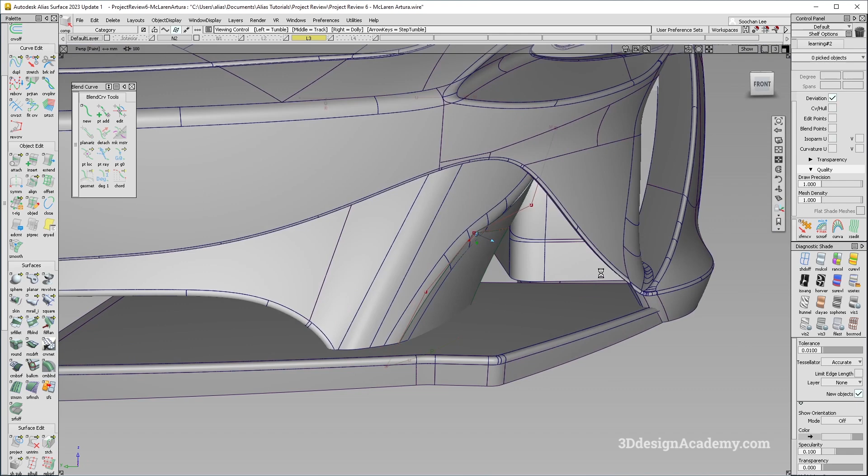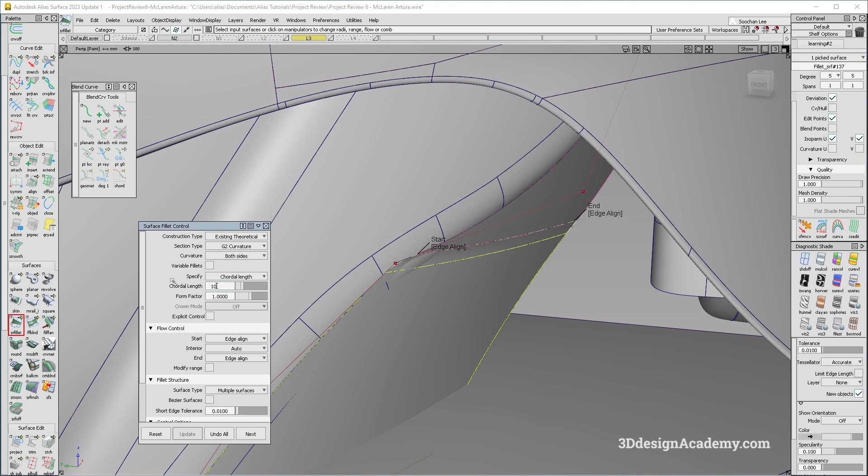So now if we were to do a fillet between the two, I'm just going to trim this one like this. Now there's probably a little bit of gap, but it's fine. I'm just trying to do a quick iteration. So I'm just going to say existing theoretical, form factor will be 1. So let's go ahead and build it. I'm just going to say edge align over here, edge align over here, and let's make it maybe 100, a little bit bigger. And as you can see, the highlight is a lot more consistent, a lot better flowing. So this is some of the things that you want to do.

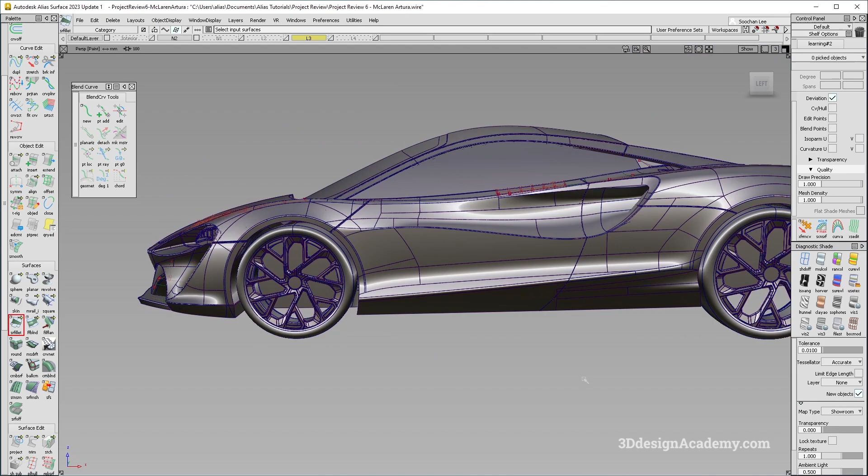All right, now there are a couple other things that could probably be done, but overall, like I said, it's a pretty good model. The CV structure, the surface patches are pretty logical. Of course, there were other big improvements made, like the detail, especially the grill. I really like the grill and how it's done over here. But yeah, while it is already a good model, I think with a few adjustments here and there it could be a great model. All right, so that is it for the project review of a McLaren Artura model.